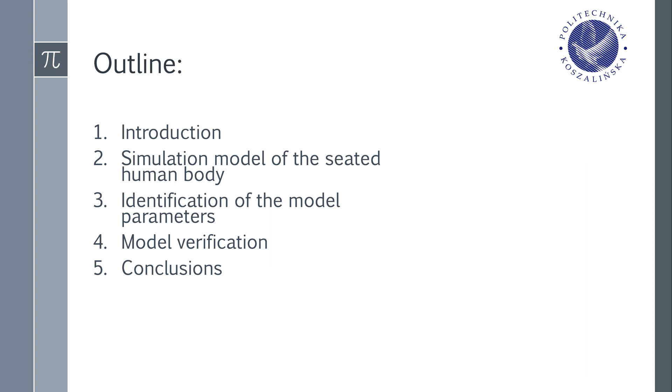In order to develop biomechanical model of the human body, at first the model structure has to be specified and then the model parameters must be identified. Biomechanical models should meet the average subject's anthropometric characteristics that represent the human population. Human anthropometric data, including masses and moments of inertia for the human body parts, are typically obtained during the medical examination of corpses, whereas the anthropometric data of individual body segments are widely discussed.

In this paper, the anthropometric data for a standard male subject of the average height and body weight is considered for the purpose of evaluating the human exposure to mechanical vibration. Currently, biomechanical models of the human body are becoming more and more useful in modeling of seating dynamics. An opportunity of creating more complex and accurate models provides for studying the vibration influence on humans on much larger scale than time-consuming laboratory tests.

Over the last 30 years, researchers have developed a large number of biomechanical models, ranging from simple ones such as 1 or few degrees of freedom to very complex ones, containing from several to several dozen degrees of freedom. The uniaxial models are often and willingly used in many research and evaluation studies due to their functional advantages. An application of such models allows for the useful evaluation of vibration with respect to human response.

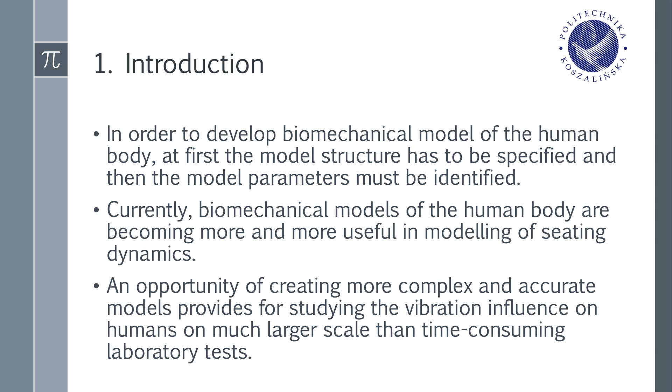The displacements QSX, QSY and QSZ are considered as model inputs that generate the seat vibration transmitted to various body segments. The second mass M2 simulates the human torso that is in contact with the backrest of stiffness C2SX and damping D2SX. In this case, the seat vibrations are transmitted to the human body along the x-axis, while vibrations of the torso in other orthogonal directions are induced by internal springs and dampers of the equivalent stiffness C21I, C32I and damping D21I, D32I coefficients, I equals X, Y, Z.

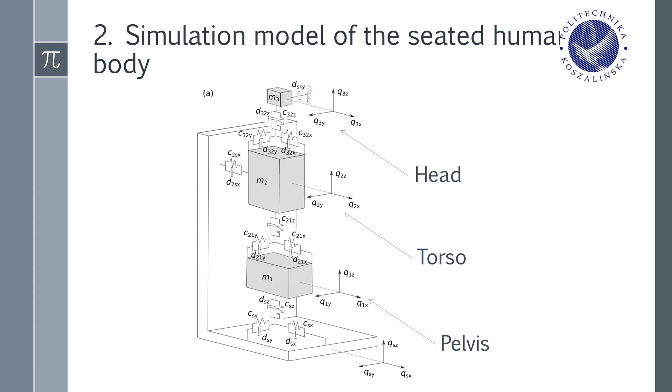The third mass M3 represents the human head that has no contact with the backrest. However, the head oscillations along X direction are stabilized by the damper, SKY, suspended in the inertial reference point, skyhook damper control.

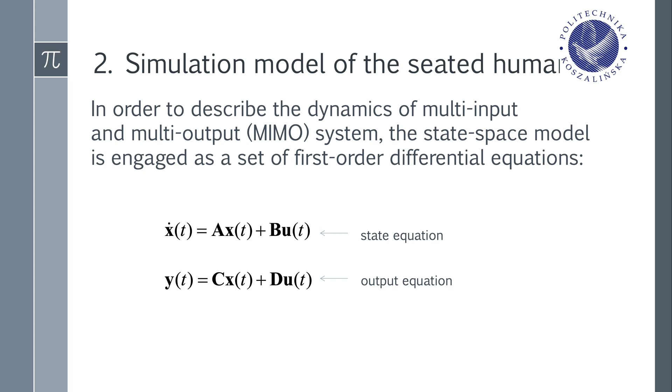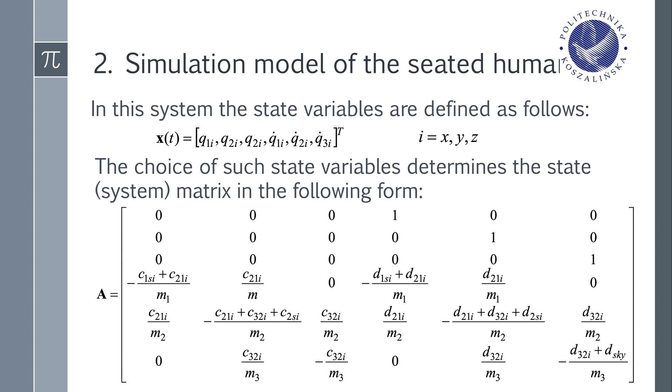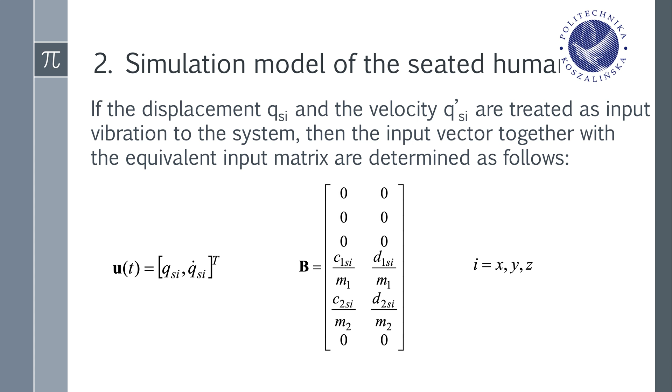If the displacement qsi and the velocity q'si are treated as input vibration to the system, then the input vector together with the equivalent input matrix are determined as follows. Acceleration signals of the human pelvis q1i, torso q2i and head q3i are selected as measured outputs, thus the output vector is described in the following way. The resultant output matrix for calculating the accelerations of particular human body parts is expressed as, under the assumption that the system inputs do not affect the system outputs directly and therefore the feed-through matrix D is the zero matrix.

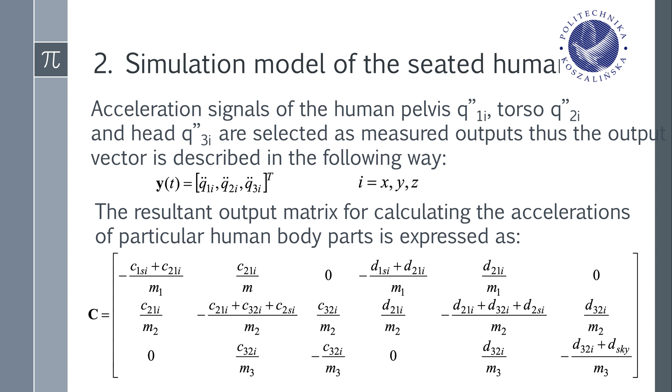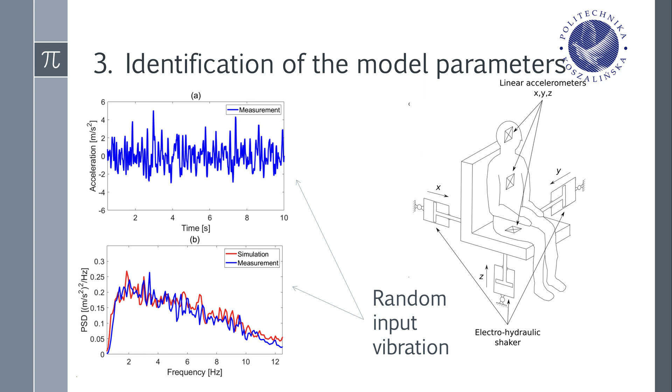In order to evaluate unknown parameters of the model, the transmissibility function is used to evaluate the dynamic response of human body parts in the frequency domain. When the transmissibility magnitude is high, it means substantial vibration is transferred to a given part of the human body from seat base. This function is calculated by using the following relation, where CSD is the cross-spectral density of two distinct signals, the acceleration of input vibration and the acceleration measured at a given body part, that is pelvis, j equals 1, torso, j equals 2, head, j equals 3, that are determined along specific axis of the coordinate system, i equals x, y, z. PSD is the power spectral density of the input acceleration, f is the frequency in hertz.

The proposed identification method minimizes the error between numerically simulated and experimentally measured transmissibility functions over the frequency range of 1 to 12 Hz. For that reason the root mean square error, RMSE, is formulated in such a way, where T and T-hat are the transmissibility functions obtained by means of numerical simulations and laboratory measurements, respectively, assuming averaged masses of the particular human body parts, pelvis M1 equals 25.18 kg, torso M2 equals 46.77 kg, head M3 equals 8.04 kg. The error minimization process involves the decision variables describing visco-elastic characteristics of the biomechanical model.

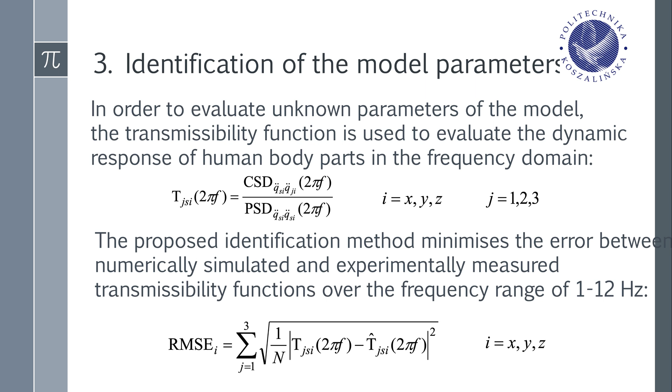In order to find the minimum of the objective function, the gradient method is used. This method is implemented in the MATLAB registered software as the fmincon function. The nonlinear programming solver is used for minimizing the multivariable function that is constrained by the set of lower and upper bounds. The initial conditions play an extremely important role for the gradient methods, therefore the proposed optimization is realized 10 times using randomly generated starting points. Such a procedure guarantees finding model parameters that correspond to the global optimum of the objective function.

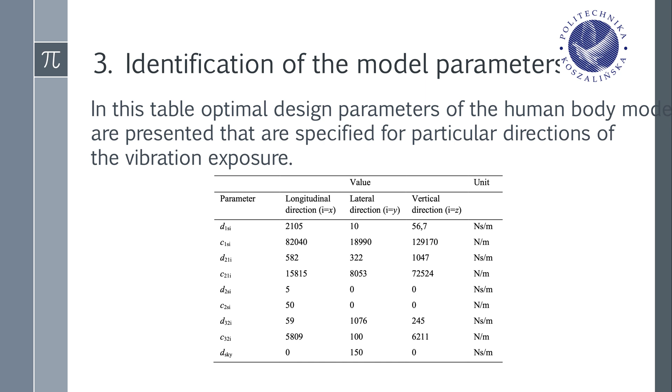The simulation and measurement results for longitudinal x direction are compared in figure where two local maxima of the transmissibility function, the first maximum around 2 Hz and the second around 3 Hz, are recognized in case of head measurements, while the model shows only one maximum exactly between these frequencies, that is approximately about 2.5 Hz. Moreover, the head vibration transmission responses for the frequencies above 6 Hz are higher in comparison with actual measurements executed in laboratories. Although a small shift in resonance frequency, approximately 0.5 Hz, of the torso is noticed, the simulated and measured transmissibility behavior of torso and pelvis are comparable at higher vibration frequencies.

The greatest discrepancy is shown for the pelvis exposed to vibration measured along the transversal y-axis, Fig. B. About the second resonant frequency of 5 Hz, unexpected vibrations with a too high amplitude are achieved by using the simulation model, and also the proposed human body model gives slightly lower vibration levels than the measured subject at higher frequency range, above 7 Hz.

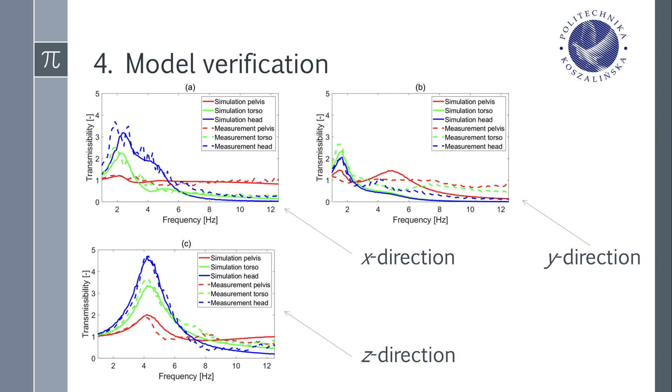In contrast to horizontal vibrations, very good agreement is observed between measurements and simulations in vertical z direction. As shown in Fig. C, the vibration transmission characteristics for each human body part are well correlated in the whole frequency range, that is at frequencies from 1 to 12 Hz. Nevertheless, for each individual axis, i equals x, y, z, the simplified model can well represent the biomechanical behavior of head, which is the most important part of the human body.

In this paper, an unconventional methodology for creating a simple 3-mass model is proposed in order to reproduce and study the biodynamic response of seated human subjects exposed to whole body vibration. The recommended model structure is greatly simplified. However, it reproduces quite well the vibration transmissibility behavior of the human body. Although the masses of individual human body parts are defined a priori based on literature studies, the unknown model parameters, that is stiffnesses and damping coefficients, are identified by using the optimization procedure that minimizes the root mean square error, RMSE, between simulation and measurement results.

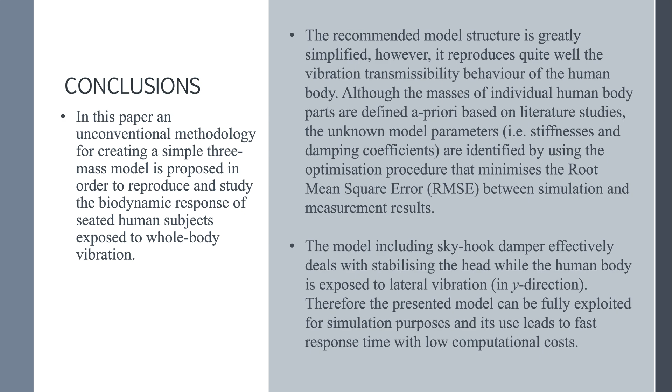The model, including skyhook damper, effectively deals with stabilizing the head while the human body is exposed to lateral vibration in y direction. Therefore, the presented model can be fully exploited for simulation purposes, and its use leads to fast response time with low computational costs. Thank you for your attention.